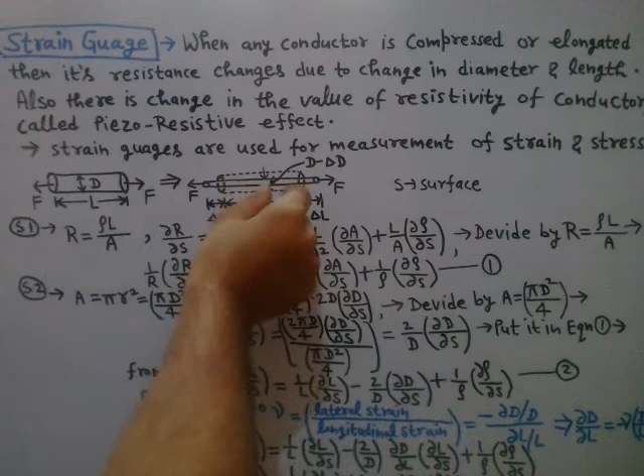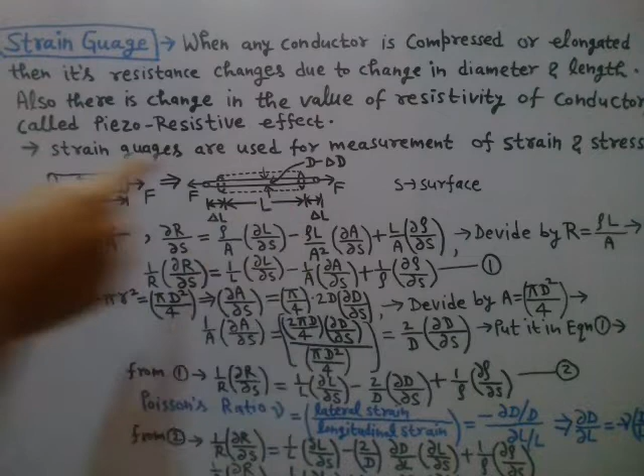So basically I am elongating the conductor wire. Due to this elongation, the length of the conductor will increase and the diameter will decrease. So length will change and diameter will also change. Due to this change in diameter and length, the resistance of the conductor will change.

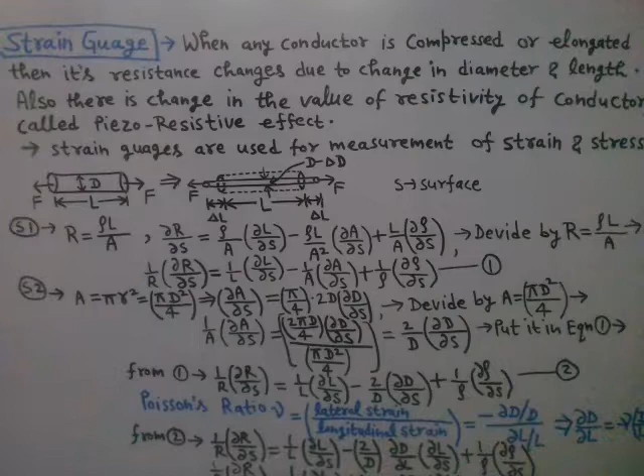So I will go through the derivation in total 5 steps. I will give you 5 steps. In 5 steps I am going to do the derivation.

So step number 1: R is equal to rho L by A. That's a basic relation. R is the resistance of the conductor, rho is the resistivity of the conductor material, L is the length of the conductor, and A is the area of cross section. A is equal to pi r square.

Differentiate this R equals rho L by A with respect to surface S. S is the surface of the conductor. So del R by del S equals, differentiating the right hand side, doing partial differentiation of rho, partial differentiation of L, and partial differentiation of A.

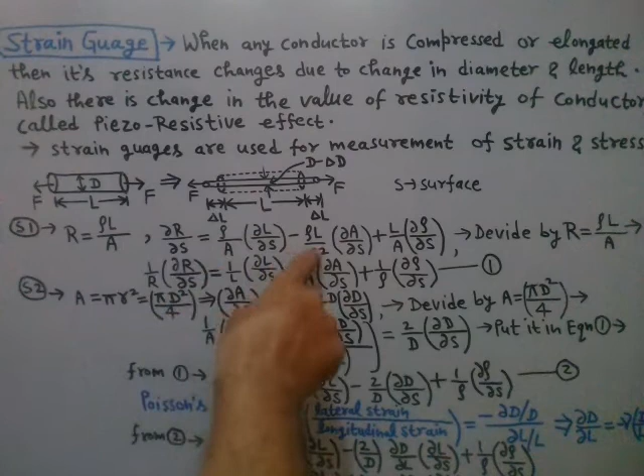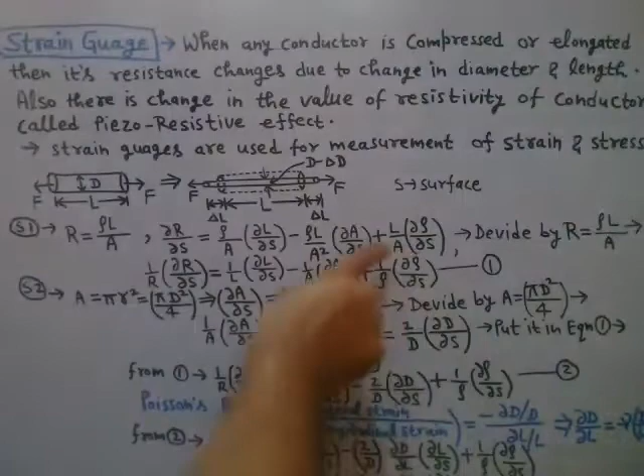In the very first term I write rho by A, taking it outside and differentiating L with respect to S, giving del L by del S, minus rho L by A square. I am differentiating 1 by A, or A inverse, so A to the power minus 1 differentiates to minus A to the power minus 2. That gives rho L by A square del A by del S, plus taking L by A outside, you write del rho by del S.

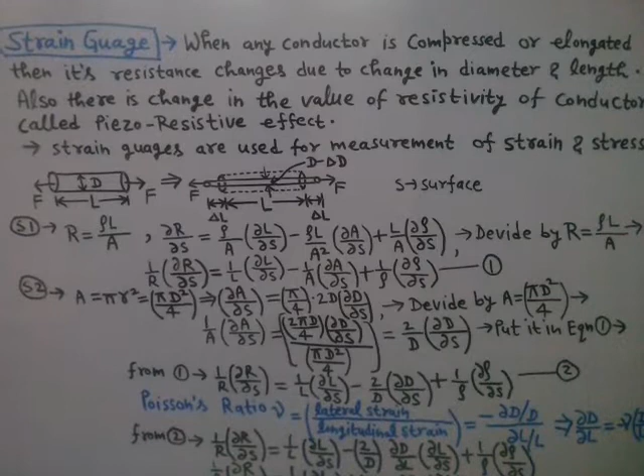Now divide this whole equation by R equals rho L by A. Divide left hand side by R and right hand side by rho L by A, term by term. So you get 1 by R del R by del S equals: rho by A cancels giving 1 by L del L by del S, minus rho L by A cancels giving 1 by A del A by del S, plus L by A cancels giving 1 by rho del rho by del S. That is equation number 1.

Now step number 2. Take A is equal to pi r square, where small r is the radius, equal to diameter by 2, half of the diameter. So here I can write pi d square by 4, where D is the diameter.

Differentiate this with respect to surface S, partial differentiation: del A by del S equals pi by 4 times d square, which when differentiated with respect to S gives 2d into del D by del S. So divide this whole expression by A equals pi d square by 4.

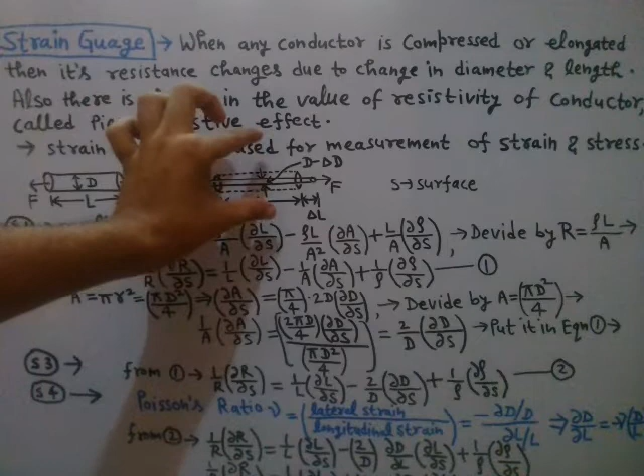Poisson's ratio is equal to lateral strain by longitudinal strain. Lateral strain means along the diameter, that is del D by D. Longitudinal strain means along the length, that is del L by L.

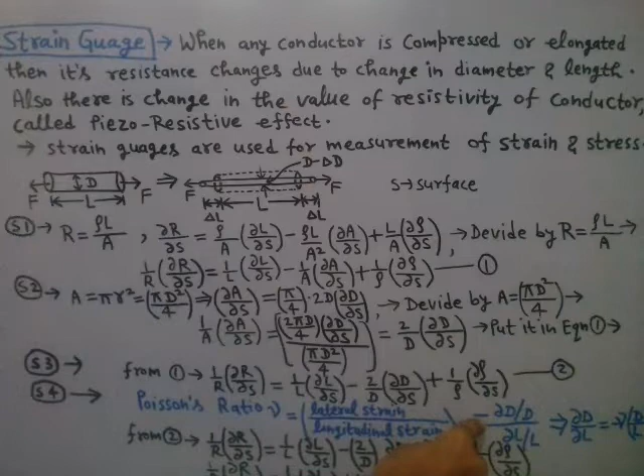Now you see there is a decrement in the diameter. When you elongate this conductor, there is a decrement in the diameter, that is d minus delta d. So I am representing this decrease by a negative sign, which shows the decrement in the diameter. So lateral strain is minus del d by d, divided by del L by L, which is equal to Poisson's ratio.

Now from here you calculate del d by del L is equal to the Greek letter, this looking like a V, into d by L, with a minus sign. That is del d by del L. Now from this Poisson's relation you calculate this del d by del L. Now your job is to rearrange equation number 2.

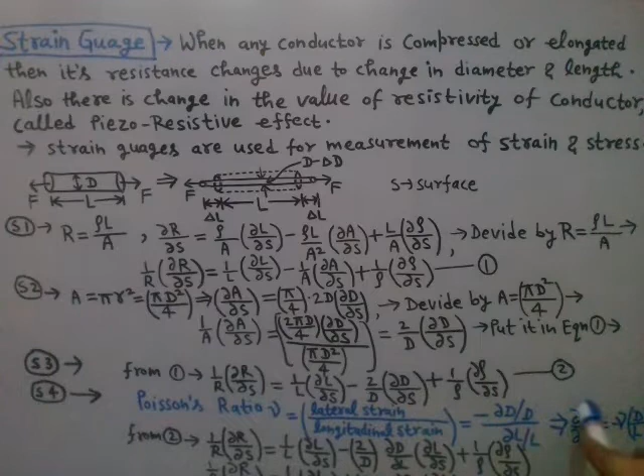In the second term, I am basically doing some substitution, rearranging the term using del d by del L. This is step number 5. In step number 5, from equation number 2, I write: 1 by R del R by del S equals 1 by L del L by del S, minus 2 by d del d by del L. I am writing del d by del s as del d by del L into del L by del s, which I can do.

See what I did: in place of del d by del s, I simply wrote del d by del L into del L by del s. If you cancel out del L, you get the same del d by del s. So now, in place of del d by del L, you simply write the Greek letter V into d by L.

So the same I am going to do. 1 by r del r by del s is equal to 1 by L del L by del s plus 2 by d into Poisson's ratio into d by L into del L by del s, plus 1 by rho del rho by del s.

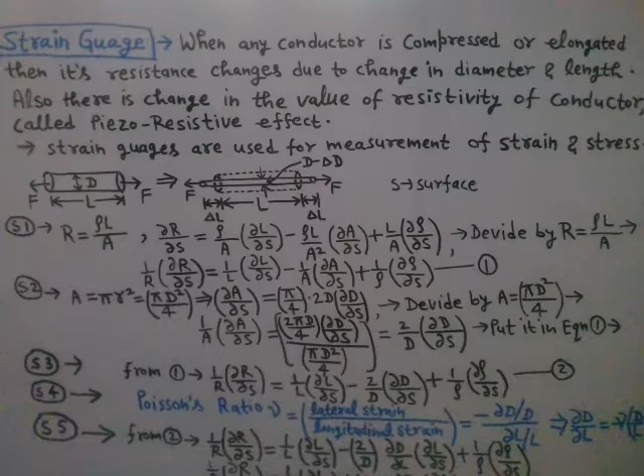Now del s is in left hand side and del s is in right hand side, so just cancel out this del s on both sides. So you will get del r by r is equal to del L by L plus 2 Poisson's ratio del L by L plus del rho by rho.

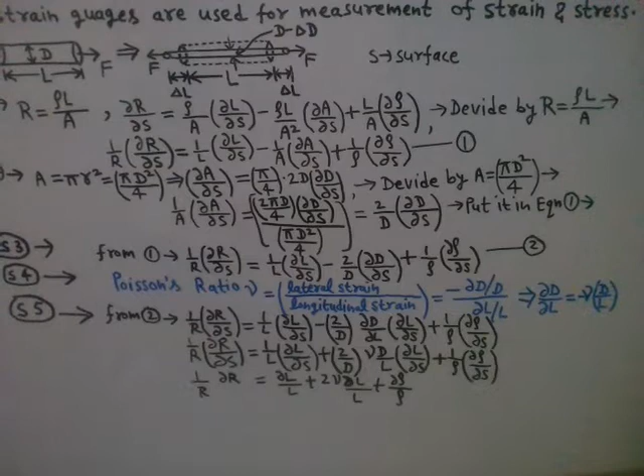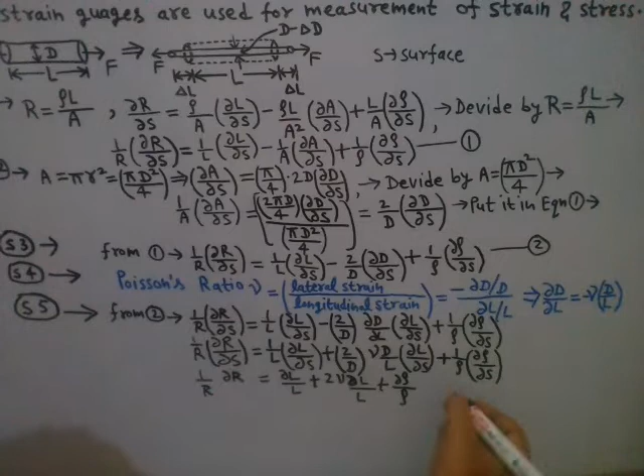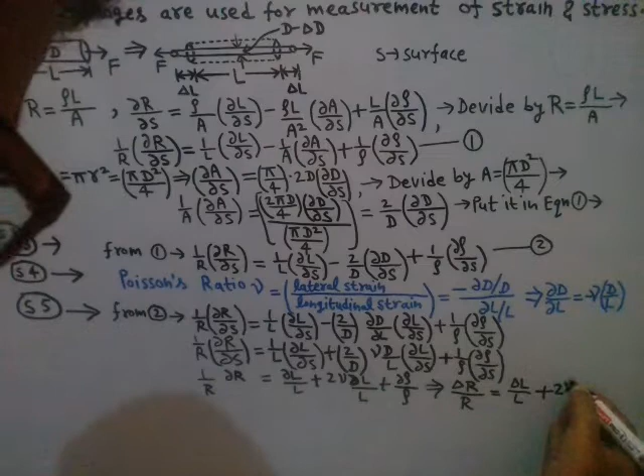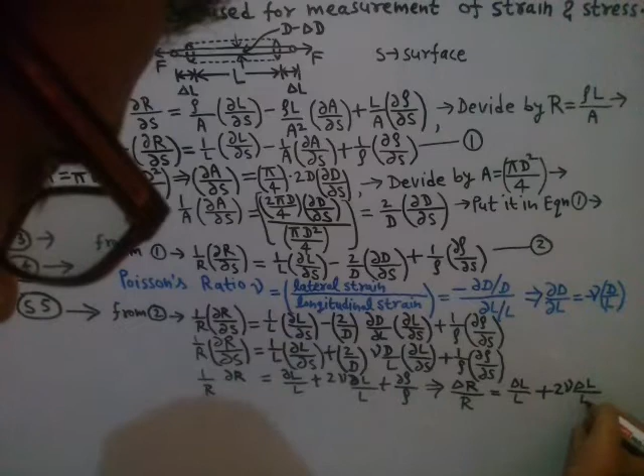Alright, so now you can simply write this. For a very small variation you can write delta r by r is equal to delta L by L plus 2 times Poisson's ratio into delta L by L plus delta rho by rho.

So on both sides divide by epsilon, which is nothing but strain, that is delta L by L. So you will get del r by epsilon into r is equal to, when you divide by epsilon, in the very first term you get 1. Plus 2 nu, del L by L gets cancelled from here and here, so 1 plus 2 nu, plus here you will get del rho by rho into epsilon. So that is what you get.

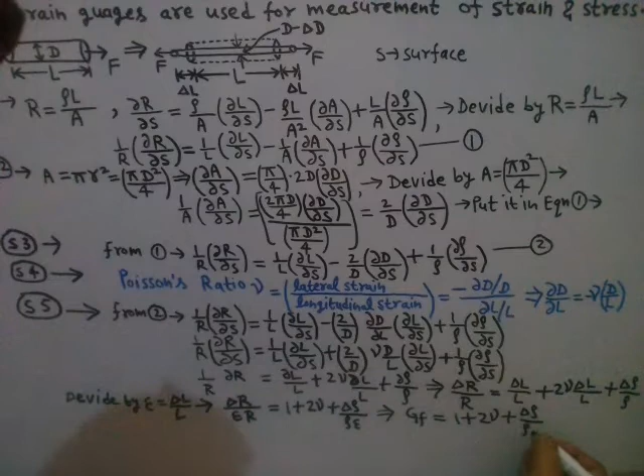Gauge factor GF is equal to 1 plus 2 into Poisson's ratio plus delta rho divided by rho into epsilon.

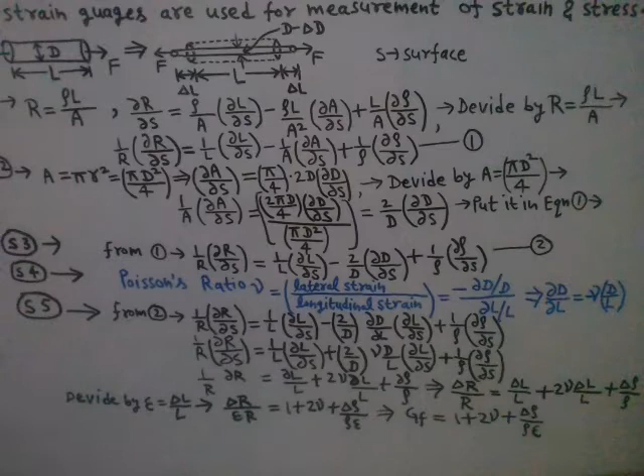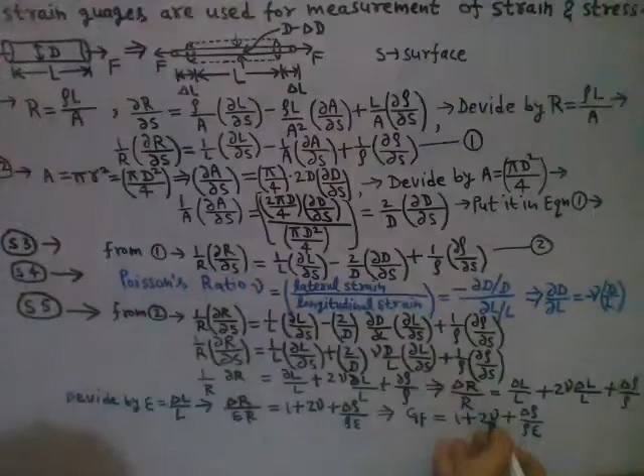So this very first term, that is 1, represents change in resistance R due to change in length L. This second term, 2 into Poisson's ratio, represents change in resistance R due to change in area A. This third term represents change in resistance R due to change in resistivity rho. So gauge factor is equal to 1 plus 2 into Poisson's ratio plus del rho by rho into epsilon.

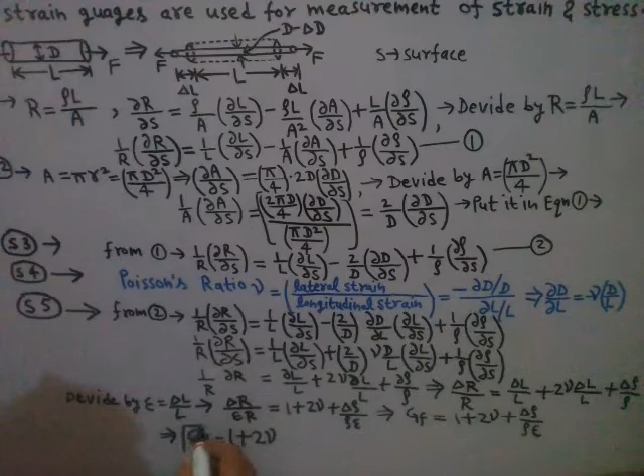If you ignore this third term, considering that the change in resistance due to change in resistivity is very small, almost negligible, then you can ignore this third term, and finally you can write gauge factor GF is equal to 1 plus 2 into Poisson's ratio. That is the final relation that you obtain.

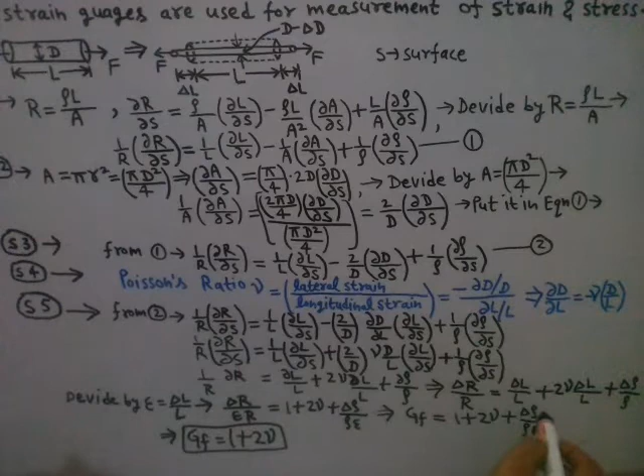So GF is basically gauge factor that we have defined, that is delta R divided by R into epsilon, where epsilon means delta L by L. That is the value of gauge factor.

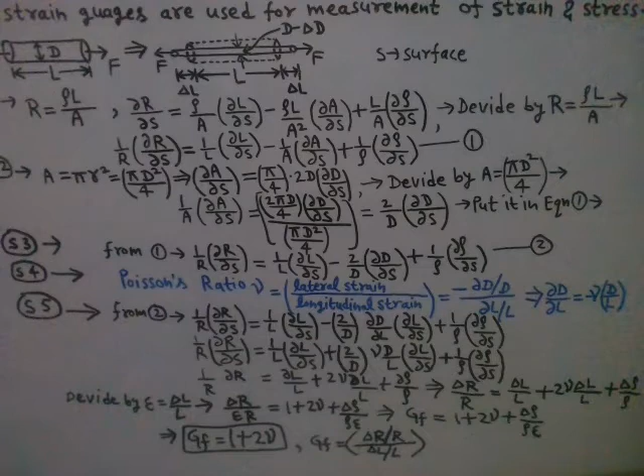So on this you can have some small numericals which is important for exams like GATE and engineering services. The derivation is simple, you just need to keep these steps in mind and practice, you will easily be able to derive this. Now let me go for a small numerical.